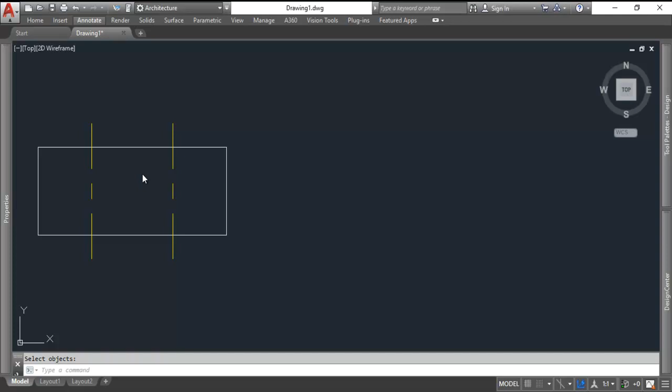So 11-2 is just a simple rectangle that's 75 by 175, which I've pre-drawn in. So for 11b, we'll put our internal threads onto this object. Everything else will be laid out freehand in space here.

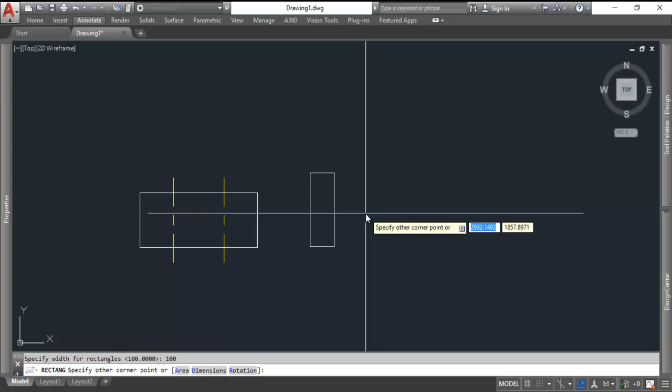So we'll start with a rectangle like we usually do. D for dimensions, enter, and we're going to be 36 millimeter diameter and 100 millimeter in length. So just get yourself a nice outline like so. Now the M36 by 4, the 4 is the distance from the crest to crest of each thread.

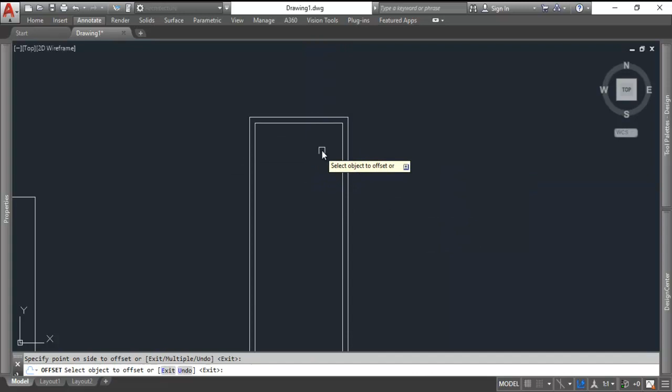So we'll need a construction line that's half that distance in, or 2 millimeters. So I'm going to do an offset of 2 millimeters to the inside. And then what we can do is draw a line up from that, so I've got a good starting point, and then a line out, and then I can connect the dots. So here I have a line that's over 2 millimeters and down 2 millimeters.

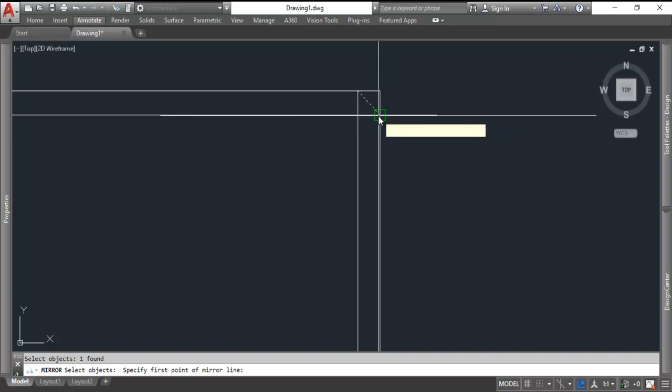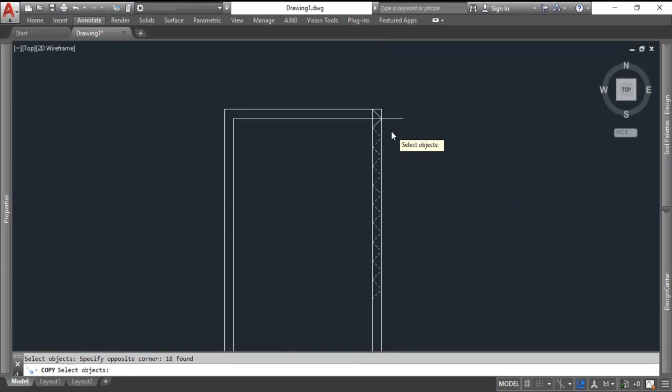And then I can mirror that line, or I can draw a new line like so. Now I can copy that down multiple times. We could do an array here, but we're not doing enough line work to really justify the work to set up an array. So just copy a few more, and once you get a few more copied, you can copy the whole group and then go from endpoint to endpoint to define your threads.

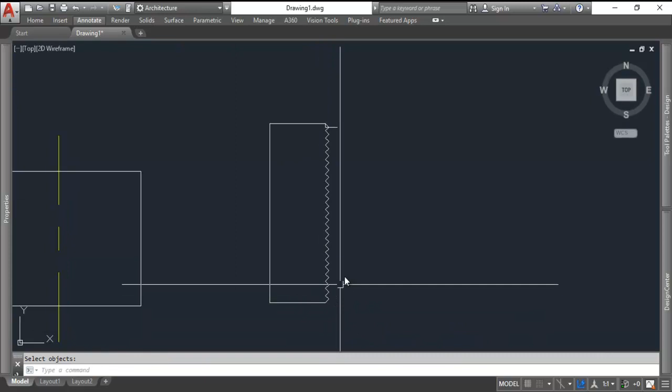Just like so. If you go too far, just erase what's left, erase your construction line, and then we can actually do a trim from that point to that point and trim away what remains, erase that outer line and any other construction lines that remain.

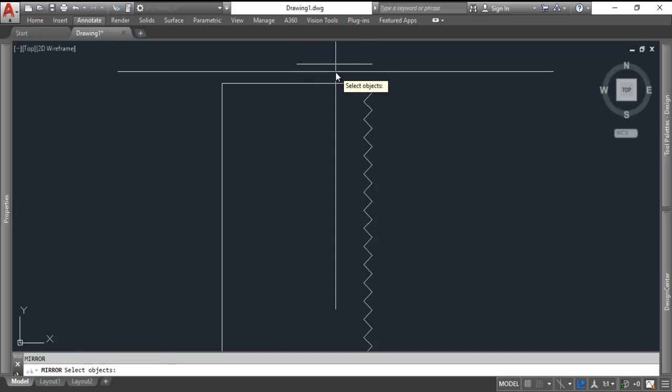So there we have the first half of our thread. Now I can't do a perfect mirror because I messed up the length of this line, so let me draw another line that goes over half of 36, which is 18, and then that's going to be my mirror point. So if I do a mirror of all of those crests and valleys, don't erase the source objects, then I can do my final trim here and erase what's left. So that gives me my base outline of my threads.

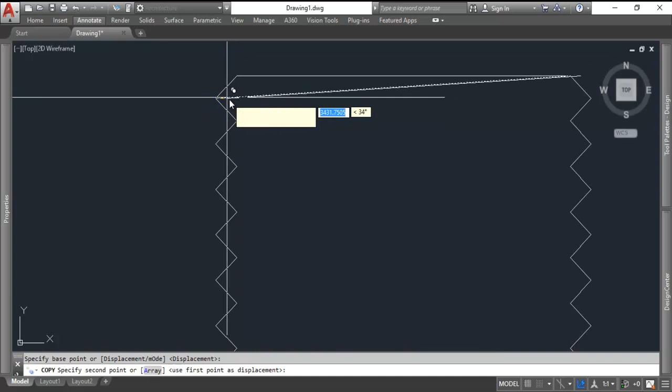Now we're ready for the actual thread lines. So just go from one crest to one valley and do a simple copy from endpoint to endpoint. Get a few of those drawn in. Now you can pick all of them and go from peak to peak here, now is what I've happened to click, and work your way down.

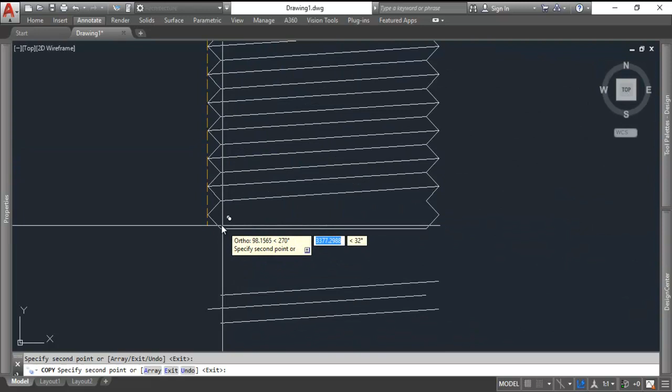We could do an array. It makes sense if this was a very long fastener, but it's short enough that it'd be a waste of time. And then erase what's left. So there is our external 100 millimeter long thread.

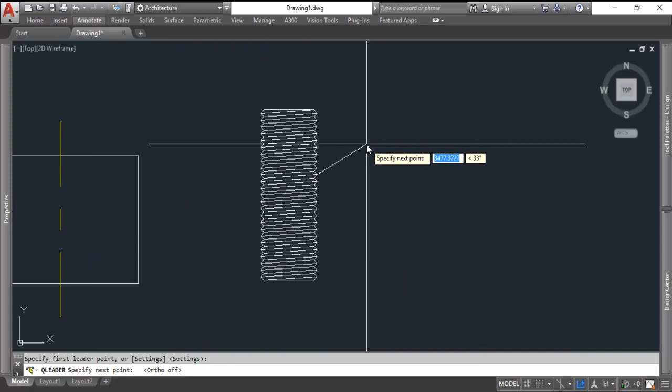And next we'll need to do our call out. So we can do a Q leader and just point to the side of your object and hit F8 to kind of tweak how your arrow comes out. And hit enter. First line should read, really we only have one line, it should be M36 by 4 by 100. Hit enter twice and we're done.

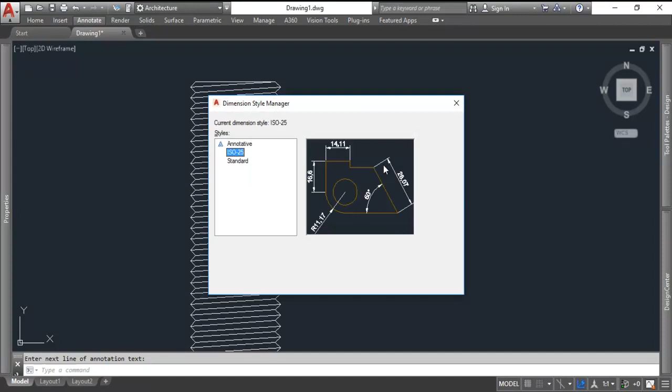Now that seems a little bit small, so remember we can go to dim style, and we're in ISO 25, we can modify that. Maybe we'll make it under fit 3 times as big.

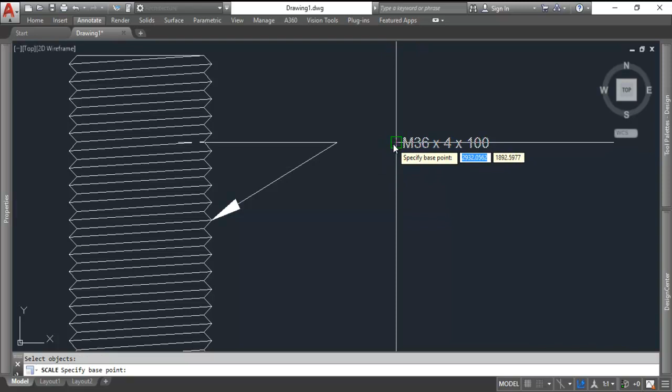And that looks better, but it did not modify our text, just the leaders. So the text, I'm going to do SC for scale, pick the text, hit enter, pick the end of that leader as the base point, and then I can type in a scale factor of 3, and then it modifies so it matches the leader.

And if your text moves like that, we should be able to clean up the leader just by using the grip point. So there we've completed number 1.

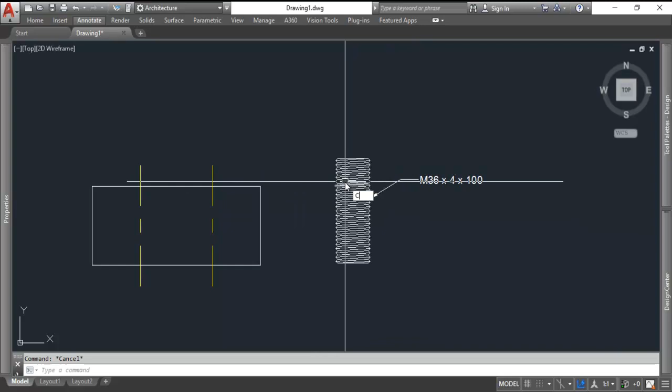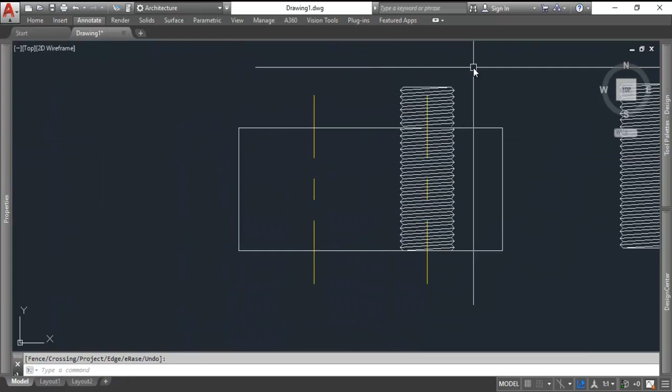Now we need to do, it's been letter A, now we're going to do B, which is an internal thread. Easy enough. Copy what you've done from the midpoint of one end of the thread using your O snap, and then paste it to your intersection. If you don't get intersection, you need to modify your snap settings so that you see intersection, and then do a simple trim and trim off any line work that is extra and erase anything that's clean out beyond there.

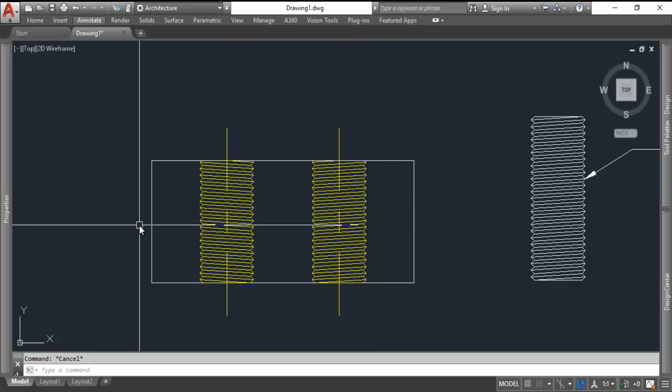And then we'll make that color maybe yellow to match what we've had before. Now, if this was a true sectional view, then we would actually want to hatch, like we're doing a cut section through each of these threaded holes. We'd want to do a hatch.

Go down to your hatch settings. We'll change that to predefined ANSI31 and try that scale of 1. Looks good. So this is what a sectional view would look like of those internal threads.

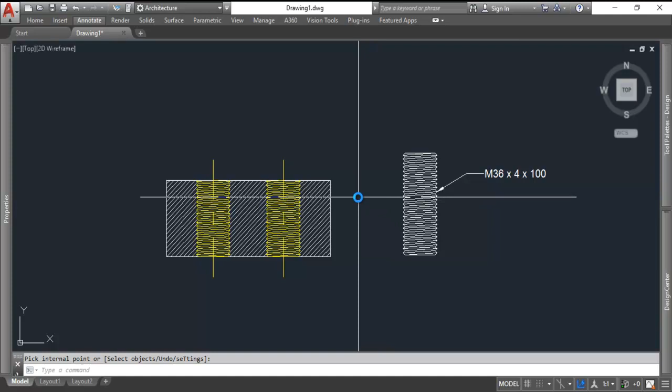Now lastly, they want a detailed, schematic, and simplified representation. This would count as our detailed. Now we need to go to schematic, and then lastly simplified. So why don't we just do that for all three since we've got that started.

So we're going backward, right? We're getting simpler now. So for the schematic, we simply have a series of straight lines. So I'm going to erase all of these angled lines.

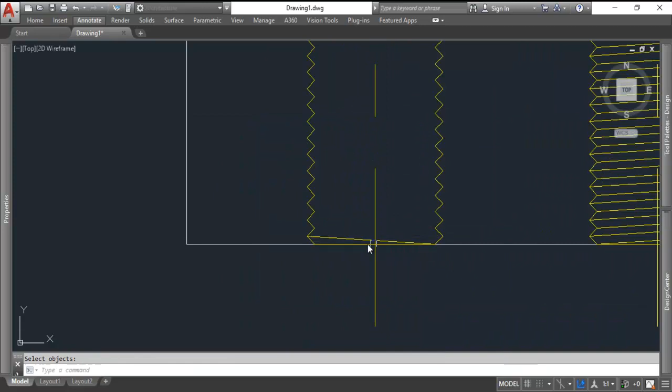And really I can erase all of that because we'll mirror it over. And we're just going to do a straight line from here down to here. And then we can erase really all those other lines.

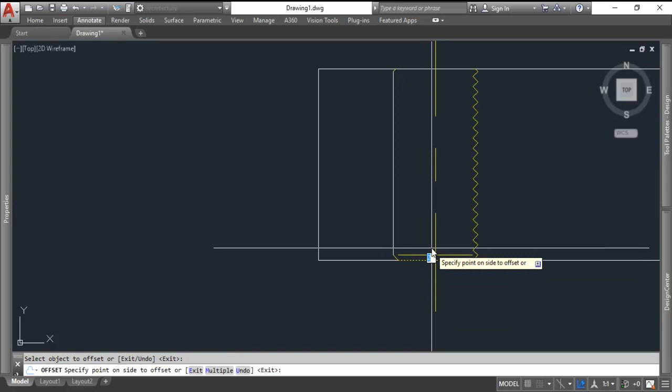Just like so. Now we're going to offset, and this is going to be 2 millimeters. Oops, make sure you go up. Now if you pay attention to what the book says for these schematics.

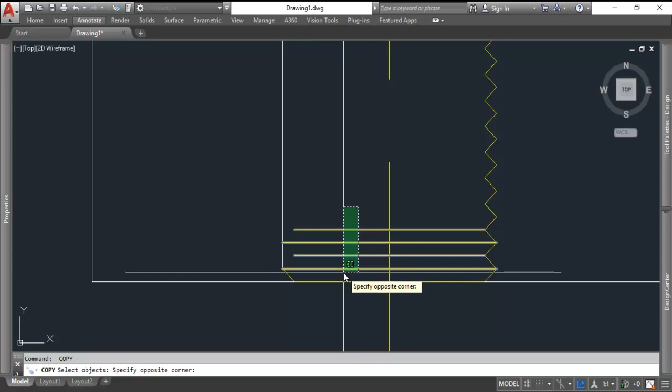One line is long and then the other line is short, and then it repeats. So I can copy those two up just like that. Now that I have 4, I can copy from end to end to get some more.

So hopefully you kind of see what that looks like. And then I'll just go ahead and copy the whole group here, from there to there. Just be thoughtful with where you're picking your endpoints so that you don't end up with a double line somewhere.

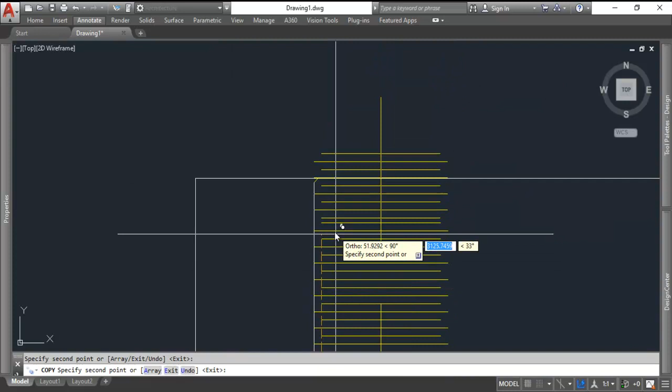And that looks pretty good. We'll mirror over our side line like so, and do the match property to make it all yellow.

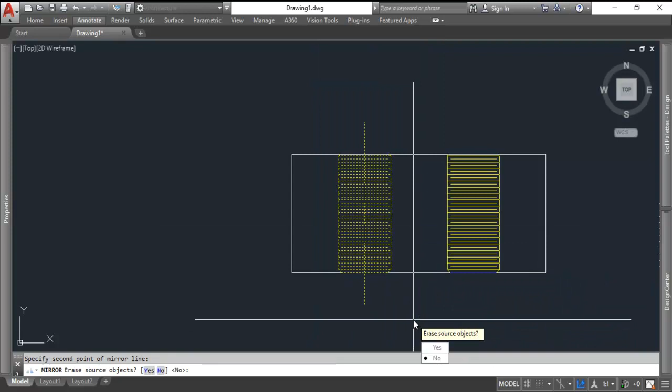Do a quick glance to make sure we haven't forgotten anything. I don't believe we have. And we'll mirror that over to the other side. So that counts as our internal thread as soon as we complete our hatch.

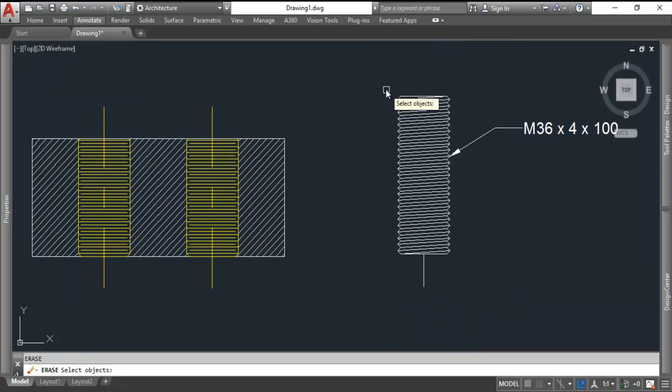And I had to redo the hatch because we don't have those jagged lines on the edges for the threads. And then for our detailed, it looks exactly the same. So I'm going to save my beginning point with a little construction line there. Just erase that away, and then copy this for our external thread over to that point.

Now we said we were 100 millimeters long, so let's do a construction line up 100. And then I'm going to erase those two, and we know how far we have to go. So we'll take a few more, being thoughtful about our pick points.

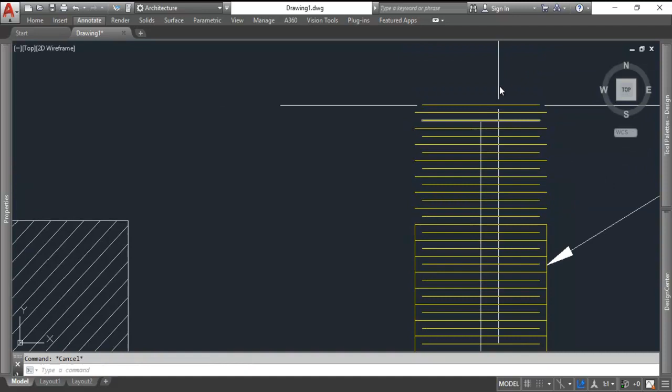And then we end with that one there, so we can do an extend the sides up to that line, and then we'll draw in our little sloped corners here, just like that. So there we have our, we'll make it white, match prop to match there.

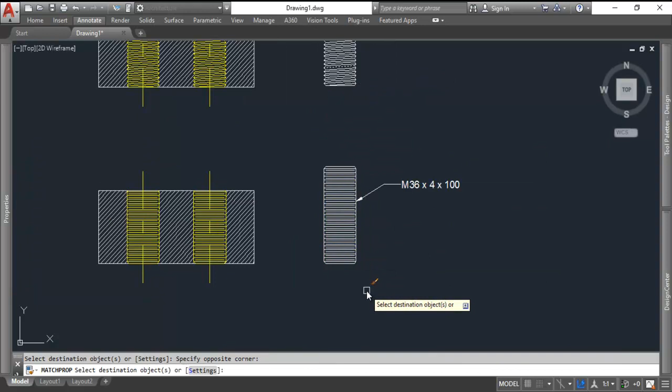So there's our external thread and our internal thread with the schematic, and then the simplified takes it a step easier. We probably should have done this the other way around, right? Started with the easy and got harder, but it's like swinging 3 bats, I suppose, right?

So for this, we actually eliminate all of these internal lines, except for the first and the last, where the pitch or the taper begins. And then they just show a hidden line from there on up. And mine didn't take.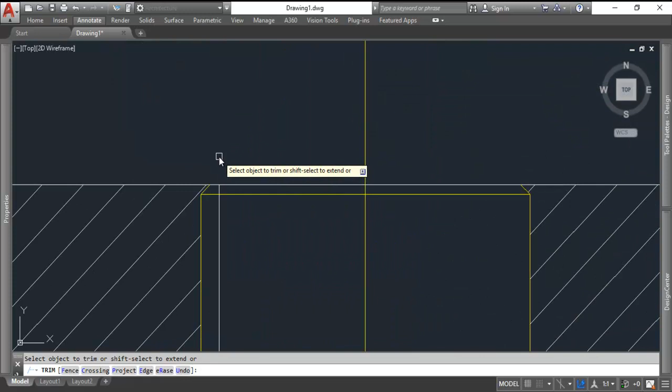All right, so it should actually be trimmed off here and trimmed off there. Pick that line. I'm going to make it a yellow hidden line. If you don't have hidden, you'll have to type in line type to load your line.

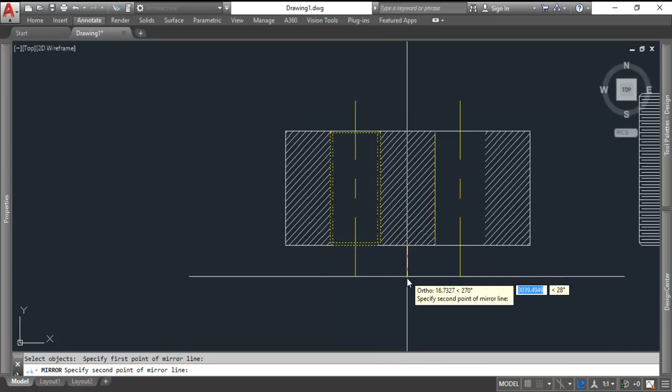Just like that. Mirror that guy to the other side, or copy if you need to. And we have our simplified for one side done. And I'm going to erase and then mirror this over to the other side, just like so.

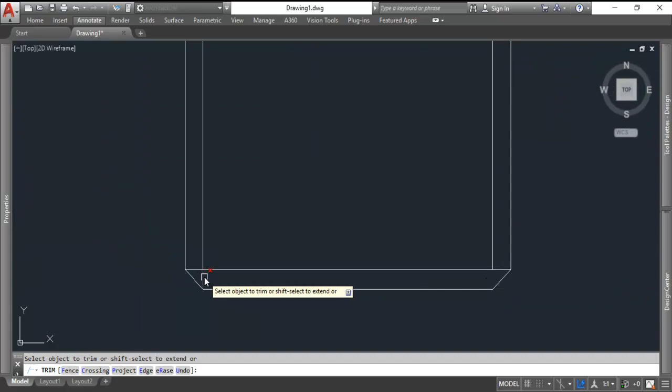And then for our complete thread, we may as well just use what we have here and draw maybe up to the perpendicular to save an extra trim at the top. Trim away this little extra at the bottom and do a match property from that hidden line to this hidden line.

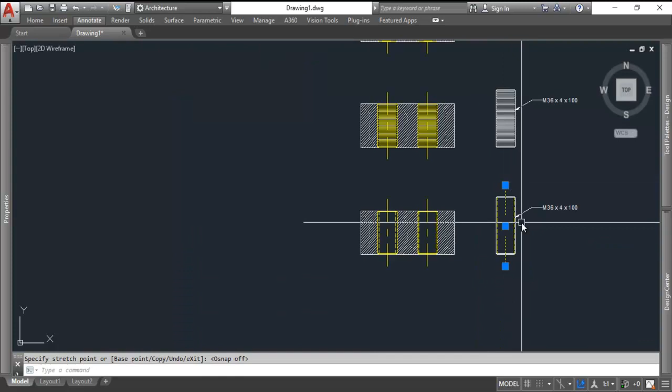And the one thing we're lacking in these, they do show a center line, so I'm going to steal my center line from there and we'll put it on here. I can just use that grip point to stretch it up a little ways. Then we'll copy that from this one to each of these perhaps.

Okay, so we have simplified completed, we have schematic completed, and we have detail completed. And if you missed that at the beginning, this is a 4mm thread. So if I give you a dimension.

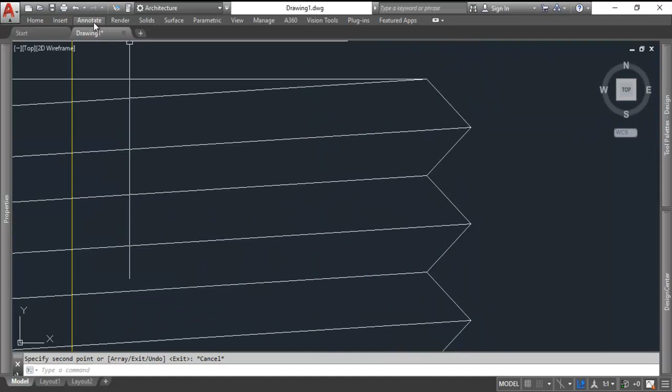From crest to crest or valley to valley, that should be 4mm as you see here. So we are over 2mm and over 2. So each of your threads should be at a 45-degree angle.